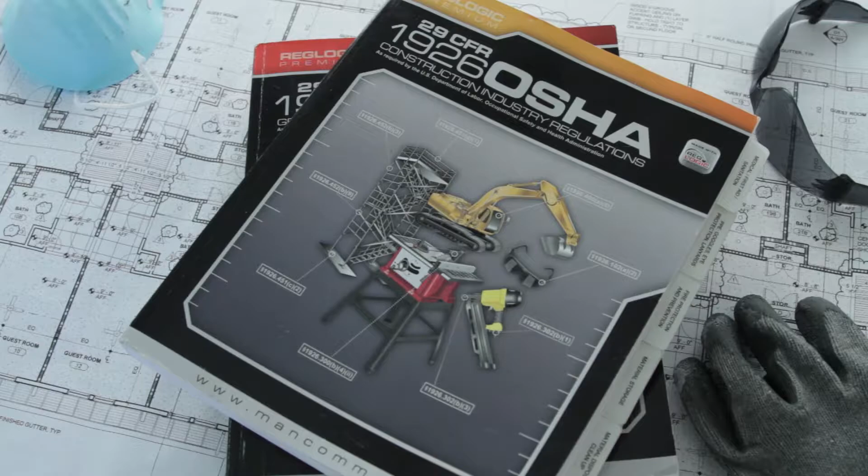Thomas Construction Group has developed a safety and health manual that you, as our subcontractor, may use in the event that you don't have your own program. Our manual has been written with requirements that are on a level with OSHA regulations and above. The Safety Orientation Field Package represents an outline of some of the rules and regulations required by Thomas Construction Group for anyone working on our job sites.

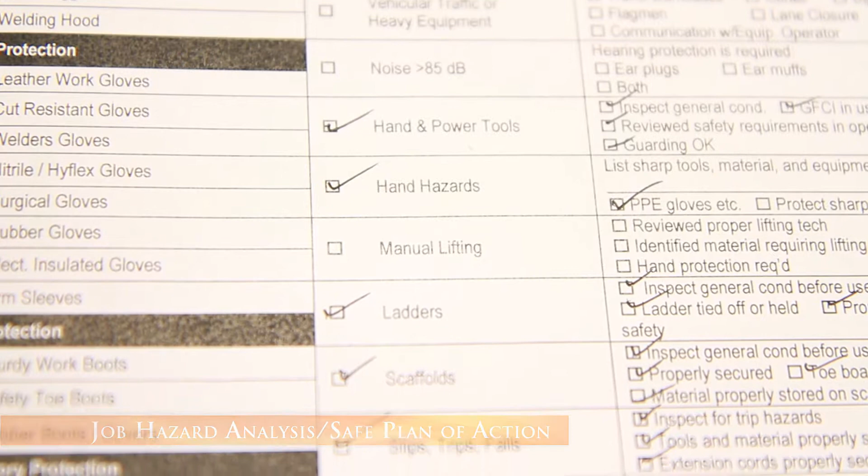As you can see, there is a lot of reference material identifying hazards in many different areas. On a Thomas Construction Group site, we are more interested in dealing with site-specific hazards. To identify and control these hazards, each worker or work group must conduct a study of the environment and any hazards that may be encountered in their specific jobs, and then determine the best method to eliminate or protect themselves from such hazards. A job hazard analysis or safe plan of action must be reviewed before work is started. Ideally, after you identify uncontrolled hazards, you will take steps to eliminate or reduce them to an acceptable risk level.

OSHA states that the Job Hazard Analysis, or JHA, is a technique that focuses on job tasks as a way to identify hazards before they occur. It focuses on the relationship between workers, the task, the tools, and the work environment. Thomas Construction Group uses a daily huddle before every new task that is encountered on the job site. This is where the JHA is discussed by the crews involved.

There is also a daily log that has the safe plan of action attached and is filled out before each job is started. The Safe Plan of Action, or SPA, is a checklist of most potential hazards and the actions to be taken to eliminate, avoid, or protect yourself from them. An accident is the occurrence of an unexpected event. Consequently, if we take time to know the hazards and identify them, there will be no unexpected events.

Whenever work is performed, your employer is responsible to have a designated competent person on site. OSHA defines a competent person as one who is capable of identifying existing or predictable hazards in the surroundings or working conditions which are unsanitary, hazardous, or dangerous to employees, and who has authorization to take prompt corrective measures to eliminate them.

If you have any questions or feel the least bit uncomfortable or unsafe about the task you are about to perform, stop and consult with your supervisor and/or designated competent person before you go any further. There are a few basic rules you must follow when working on a Thomas Construction Group job site. Thomas Construction Group has zero tolerance for the use of illegal drugs or alcoholic beverages on their job sites. Anyone injured as a result of an accident on the job will be automatically drug tested within 8 hours after

the injury. Hard hats must be worn at all times unless otherwise directed by the Thomas Construction Group superintendent. Hats are to be worn as designed, brim in the front, and no baseball caps may be worn under the hard hat. Proper clothing must be worn. Sleeves at a minimum of 4 inches in length and full-length pants. Hard sole shoes or boots must be worn at a minimum unless otherwise directed by the Thomas Construction Group superintendent.

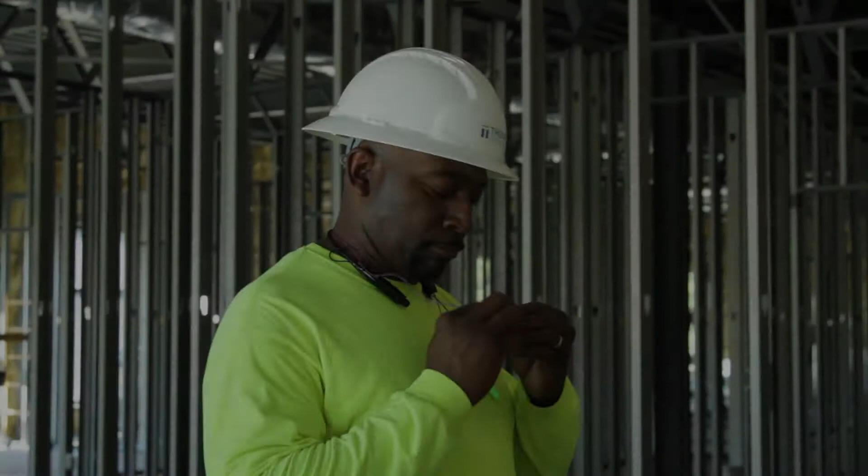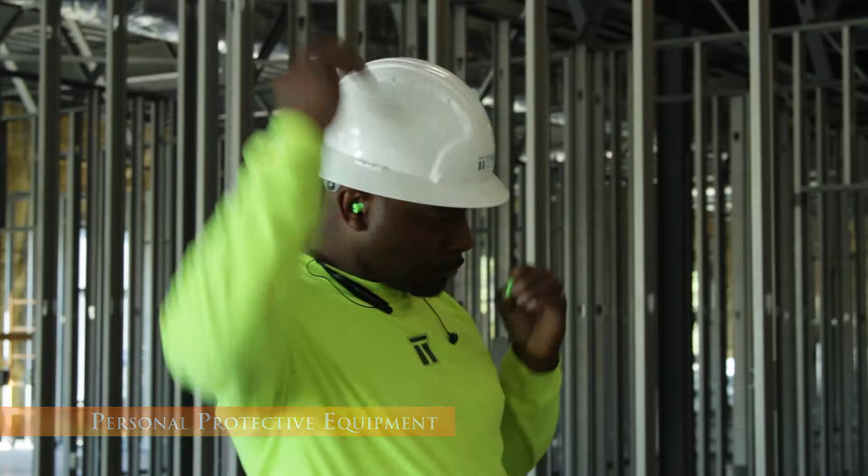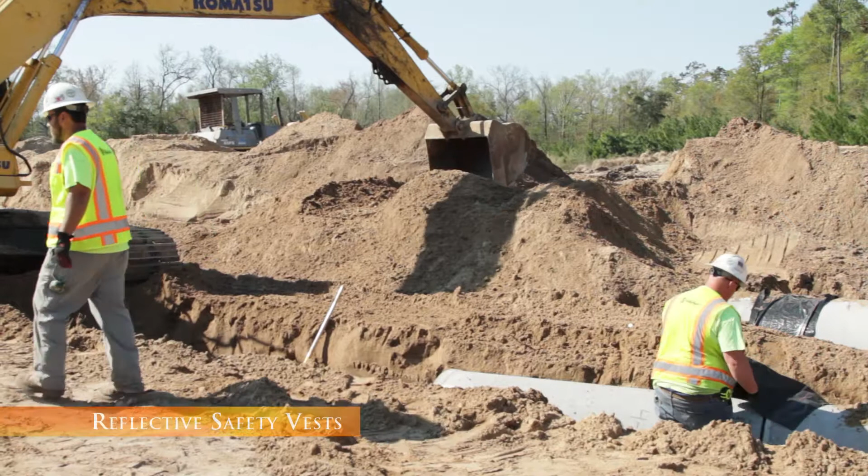Personal protective equipment, or PPE, such as safety glasses, hearing protection, gloves, face shields, respiratory protection devices, etc., shall be worn in accordance with the requirements of the OSHA Regulations 29 CFR 1926.95 through 107 Subpart E. Reflective safety vests shall be worn when working around heavy equipment, high vehicle traffic areas, or at the Thomas Construction Group superintendent's discretion. Only authorized personnel are permitted to operate equipment or vehicles on site.

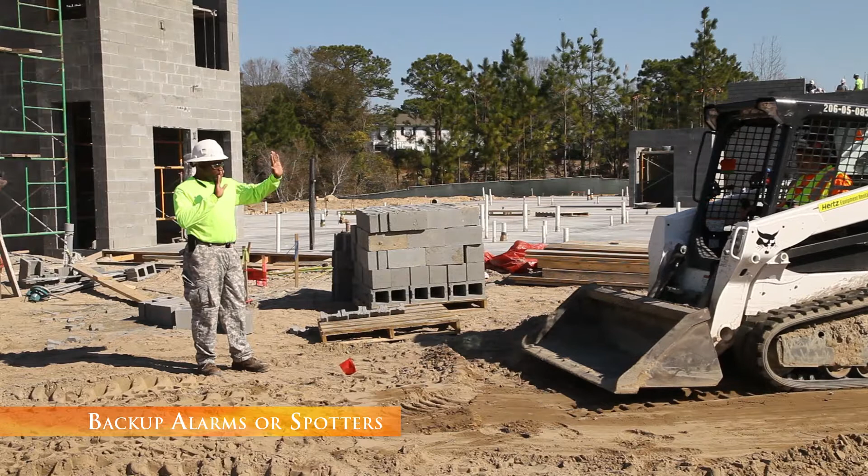Current certification is required for forklift operators. No riders on machinery or equipment. Riding in the back, outside of the cab of trucks is prohibited. All heavy equipment with limited visibility must have an operable backup alarm or a spotter when backing up. Seat belts shall be used in all vehicles and equipment that are equipped with them.

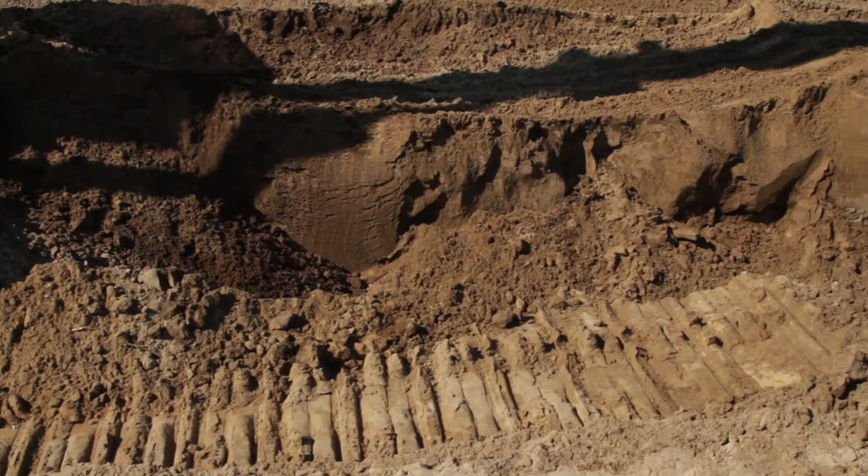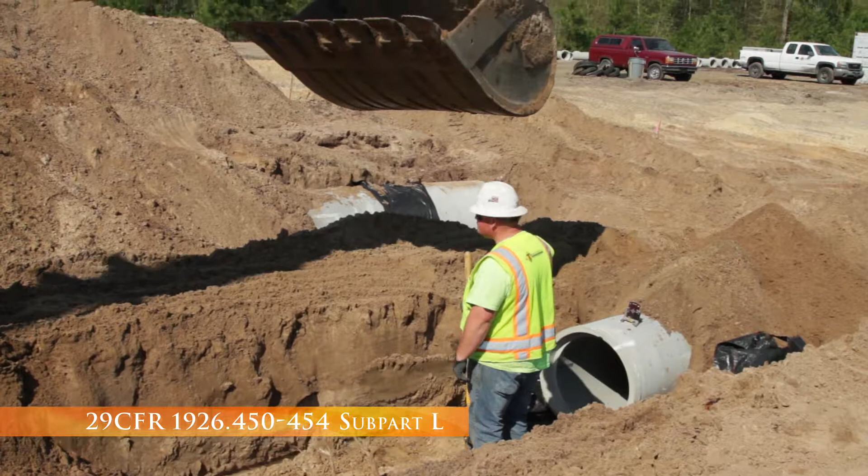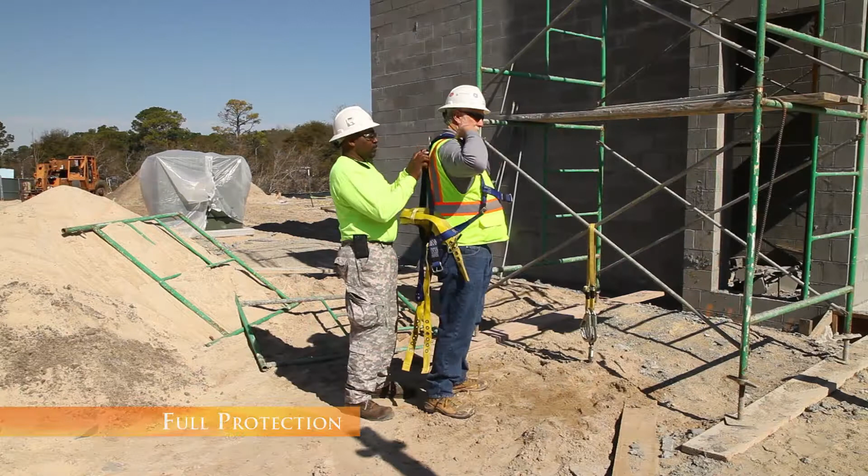No one shall enter a trench or excavation over 5 feet deep unless it is properly sloped, shielded, or shored in accordance with the OSHA standard 29 CFR 1926.650 through 652 Subpart P and has been inspected by a competent person. Immediately report all accidents, unsafe conditions, or practices to your supervisor. Any individual performing work at a height of 6 feet or more must have fall protection in accordance with OSHA Standard 29 CFR 1926.500 through 503 Subpart M.

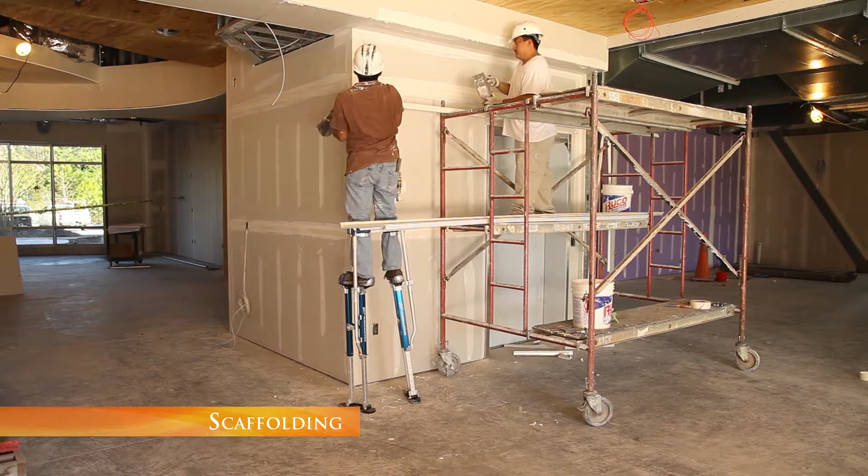All scaffolding is to be erected and maintained by a competent person in a manner consistent with OSHA Standard 29 CFR 1926.450 through 454 Subpart L. Safety Program. The Thomas Construction Group Safety and Health Manual is available for any subcontractor or sub-tier in the event that they do not have their own safety program. Any rules or regulations in these programs that are greater than the OSHA standards will take precedence over the OSHA

standards. The Thomas Construction Group Safety Program requires that anyone injured on the job must choose one of the named physicians or medical facilities listed for that job. If you seek medical treatment elsewhere other than the listed physicians or medical facilities for an on-the-job injury, you will be responsible for your medical bills.

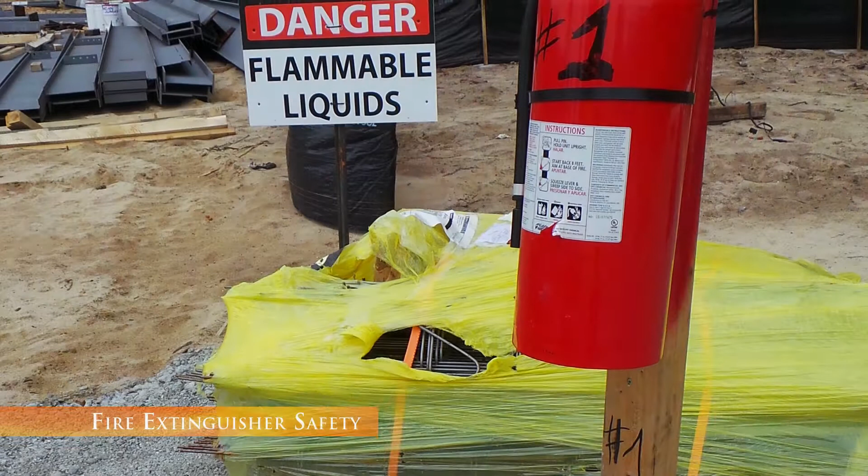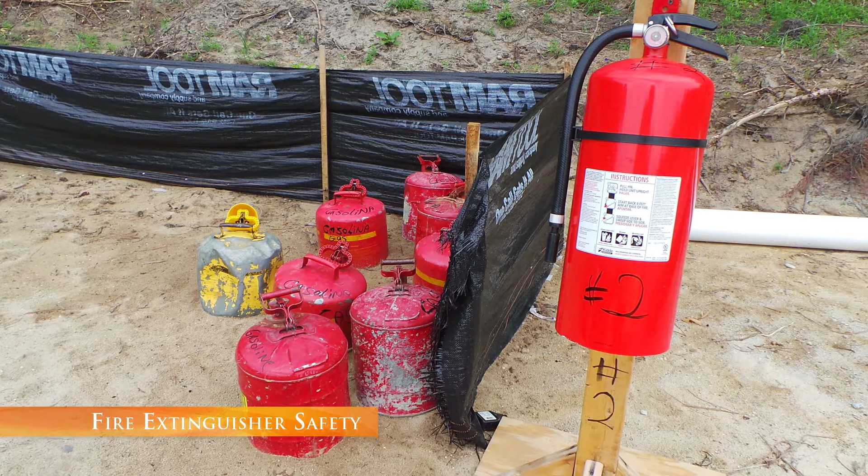Fire extinguisher safety. A fire extinguisher rated not less than 2A shall be provided for each 3,000 square feet of the protected building area. Travel distance from any point of the protected area to the nearest fire extinguisher shall not exceed 100 feet. A fire extinguisher rated not less than 10B shall be provided within 50 feet of wherever more than 5 gallons of flammable or combustible liquids or 5 pounds of flammable gas are being used on the job site.

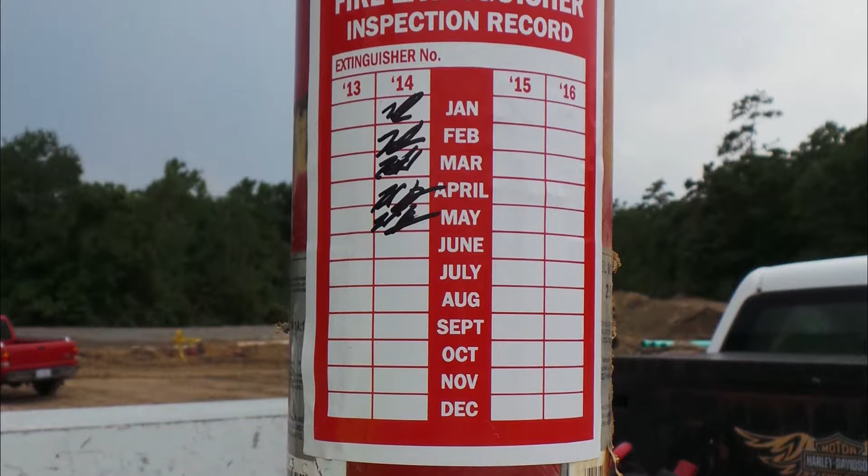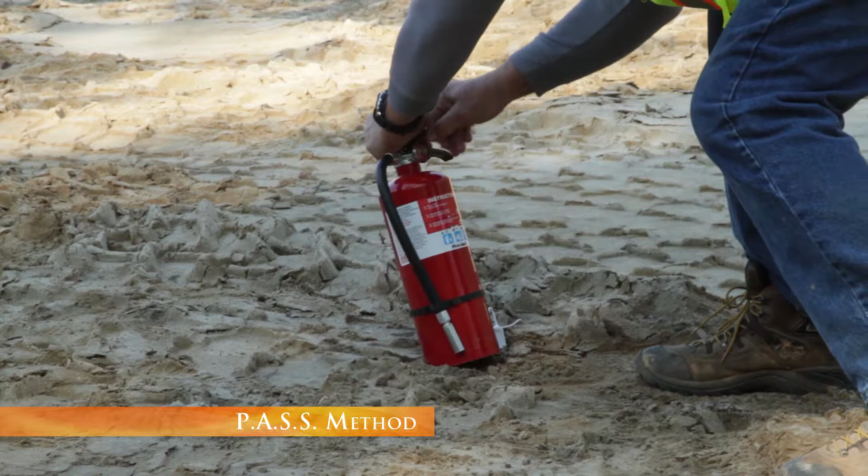Portable fire extinguishers shall be inspected periodically and maintained in accordance with Maintenance and Use of Portable Fire Extinguishers, NFPA number 10A-1970. All fires, no matter how small, must be reported immediately to your supervisor. Try to stay upwind of fire when using a fire extinguisher and use the PASS method. Pull the pin, aim the extinguisher at the base of the fire, squeeze the handle, sweep the extinguisher from side to side from outside towards the center of the fire.

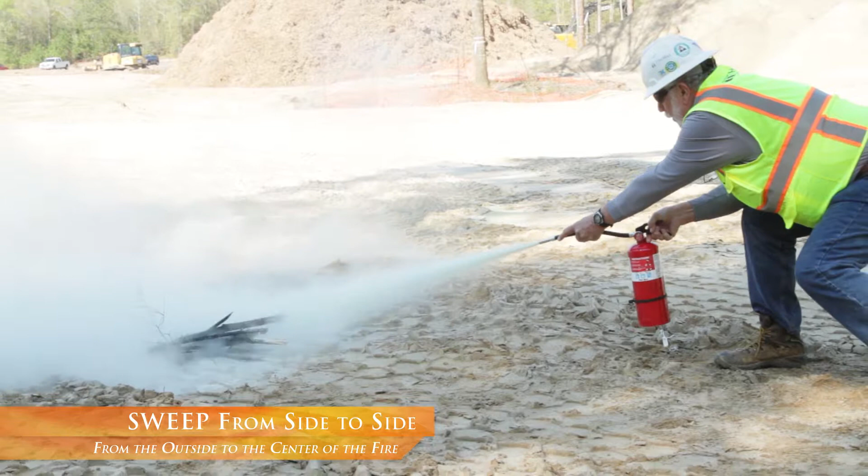Hazard communication. Most hazards will fall into 5 broad categories. 1. Flammables and combustibles. 2. Compressed gases. 3. Poisons. 4. Corrosives. 5. Irritants. A hazardous substance can enter the body via 4 routes. 1. Inhalation. 2. Ingestion. 3. Absorption. 4. Injection.

Material Safety Data Sheets, or MSDSs, contain the following information: 1. How to properly handle and store. 2. Outline spill cleanup procedures. 3. Medical and first aid procedures.

The material safety data sheets are filed in a manual kept in each Thomas Construction Group office trailer and are available for subcontractors' use. Information on chemicals that are actually on the job site is filed in the front of the MSDS manual, including a list or log of all hazardous chemicals on site.

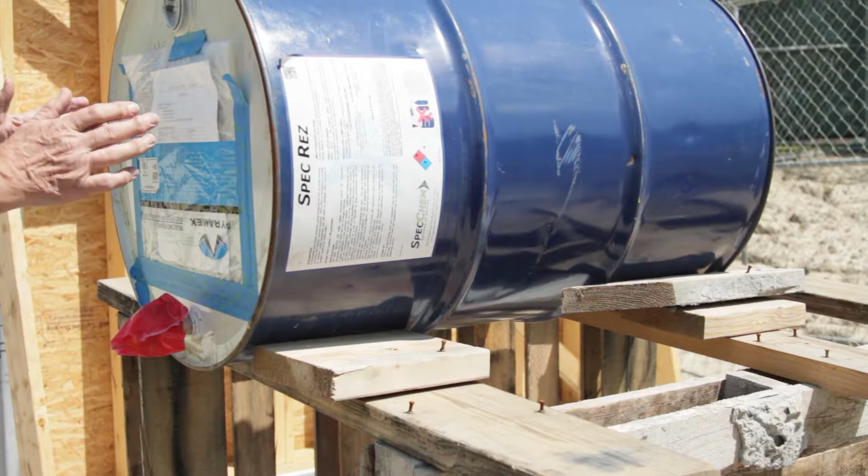All subcontractors must provide a copy of the MSDS for any chemicals that they bring on the job site. All of their personnel must be trained on the HAZCOM program by their employer and understand the hazards of any chemicals that they may be exposed to. All employees must be trained in the Globally Harmonized System, or GHS, which is associated with the Hazard Communication Standards.

Emergency Action Plan. In the event of a fire, hurricane, tornado, or other natural catastrophe at our job site, all personnel will evacuate the buildings in an orderly manner and meet at the Thomas Construction Group office trailer. If the trailer is involved in the incident, the secondary muster area will be in the parking lot. Once gathered, each group of workers or subcontractors will be accounted for by a roll call conducted by their supervisor or lead person. This information is to be passed on to the Thomas Construction Group superintendent.

Emergency phone numbers and the nearest medical facility are posted on the wall of the Thomas Construction Group office trailer. Typically, 911 is the phone number of choice to call in an emergency situation. Personnel are strictly forbidden to discuss project conditions, incidents, or accidents with the owner, media, press, or any person not directly involved with the emergency.

OSHA has determined there are 4 areas in construction that lead all others in the number of accidental injuries and deaths. If OSHA finds you in violation of any safety rules or regulations within the Focus 4 during a site audit or investigation, the citation will most likely be considered as serious, and the fines usually start at around $7,000 per violation. The Focus 4 are as follows: electrical, falls, struck by, and caught between hazards.

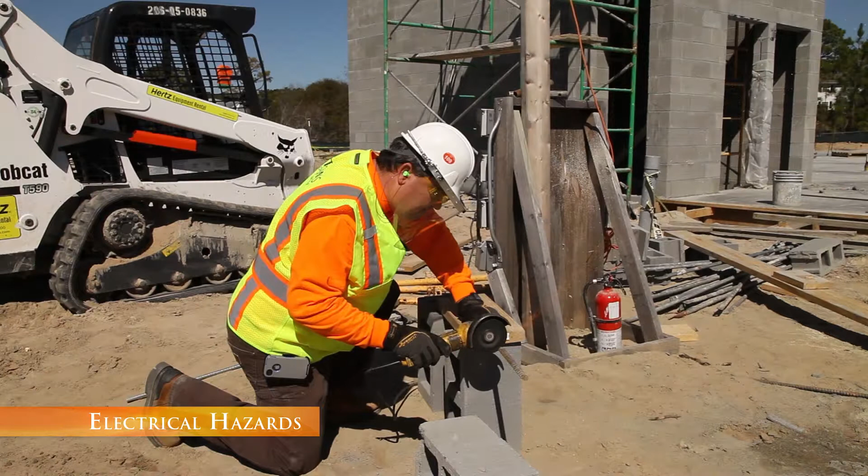1. Electrical. All electrical equipment and power tools must be protected from shock hazards by use of a ground fault circuit interrupter, or GFCI plug, or by double insulation. All electrical power drop cords must have grounding lugs and insulation of wires intact. Nothing under size 12 gauge cords should be used. Cords found defective must be repaired by a qualified person immediately or removed from service by cutting off the male plug end.

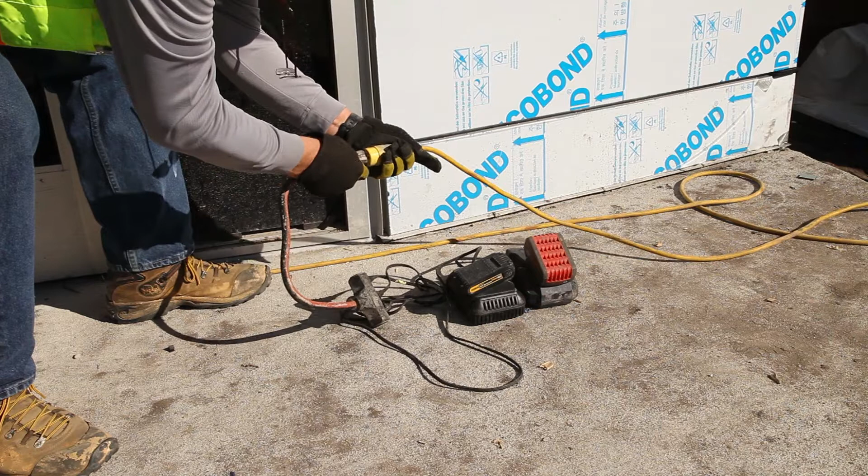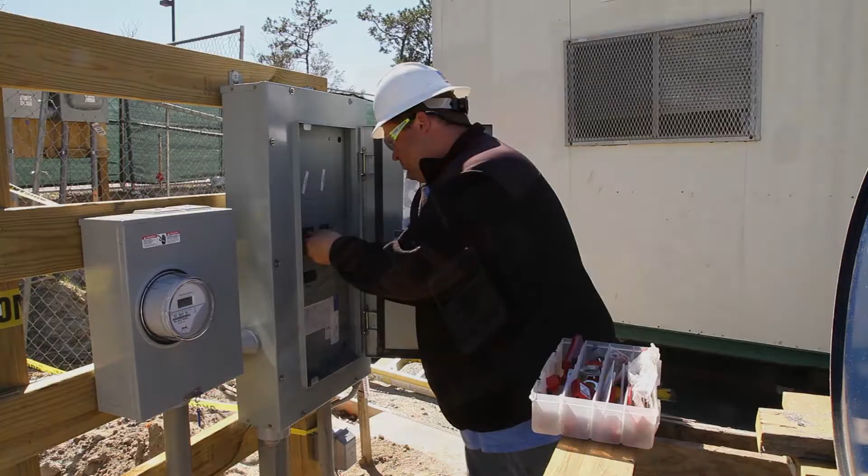Ensure that electrical equipment is free from recognized hazards that are likely to cause a serious injury or death to employees. Safety of equipment shall be determined on the basis of 29 CFR 1926.403. Lockout or tagout of energized equipment shall be in accordance with 29 CFR 1910.147 and 1926.803. Competent person required. 2-prong plugs are not permitted in the construction area unless the equipment is double insulated.

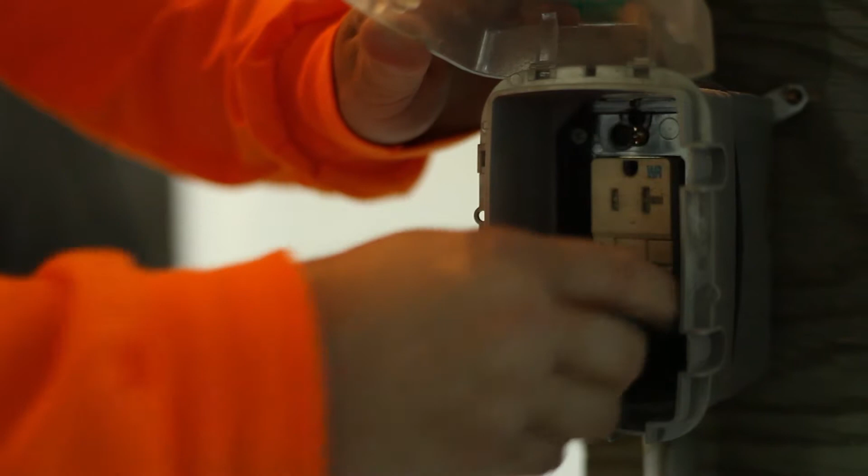Periodic inspections of drop cords, GFCIs, corded power tools, and equipment are required with proof of the actual inspections. If the subcontractor does not have a means of documentation of these inspections, we suggest that you use the Thomas Construction Group color code system for documentation.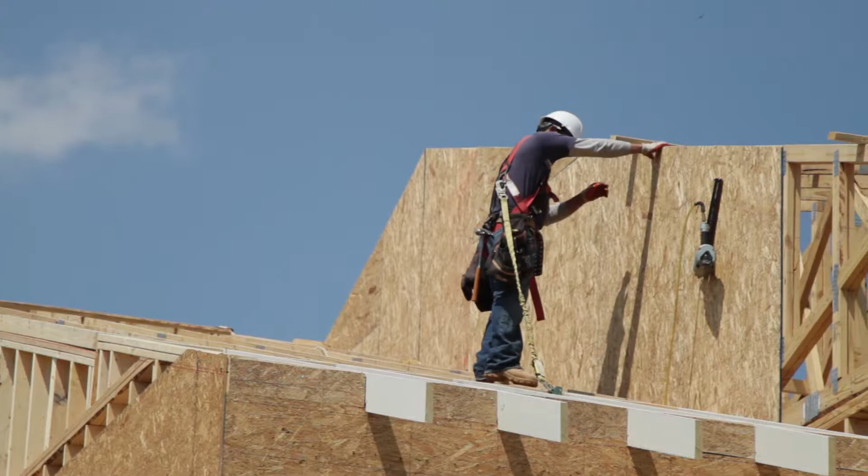Falls. Thomas Construction Group has set 6 feet as the minimum height above a lower level where fall protection must be used. Guardrail systems, a safety net system, or personal fall arrest systems are all acceptable methods of achieving adequate fall protection. Warning lines with a controlled access zone may be used in some cases. The best system to use can be determined by following the guidelines offered in 29 CFR 1926.500 through 503, Subpart M.

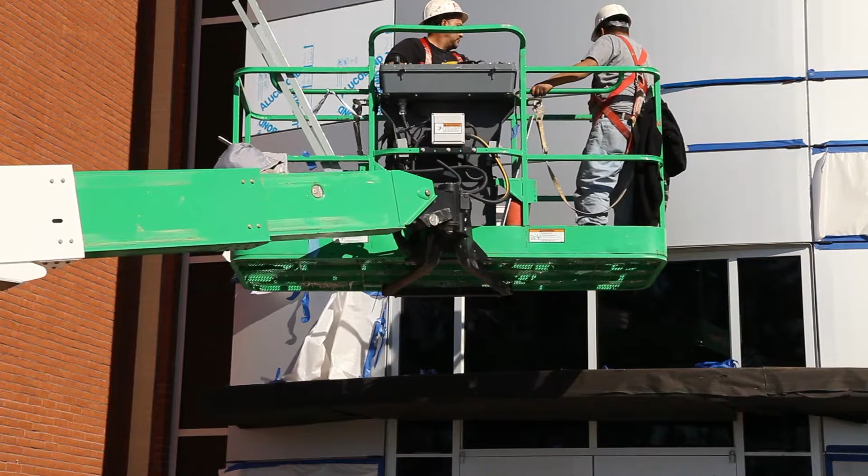All persons working at heights must be trained by their employer in the proper use of whatever fall protection system they are using before starting work. Other areas of falling would include working on ladders, scaffolding, aerial lifts, or simply tripping and falling at ground level. Ladder use is a potential concern for fall hazards.

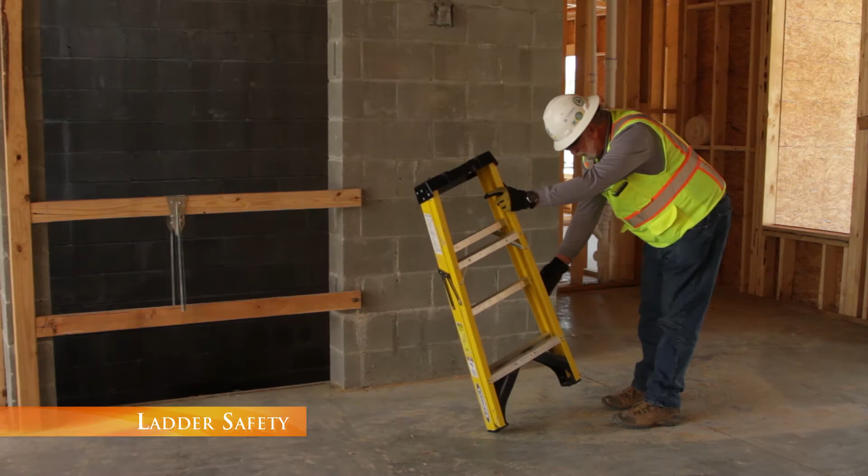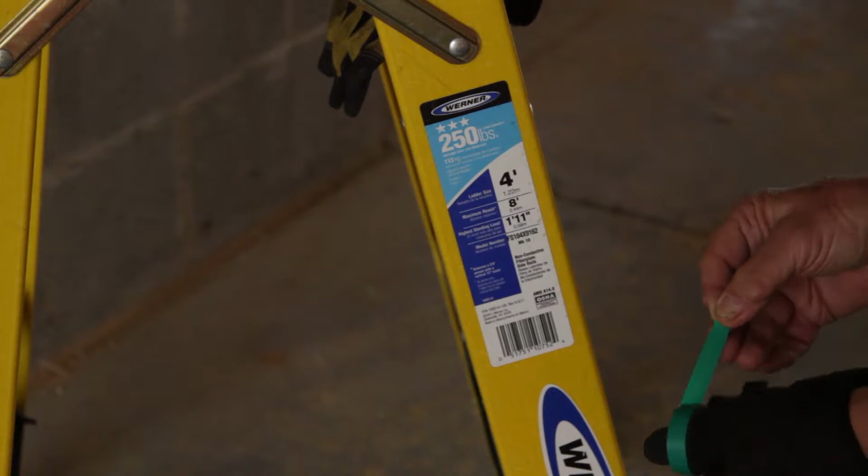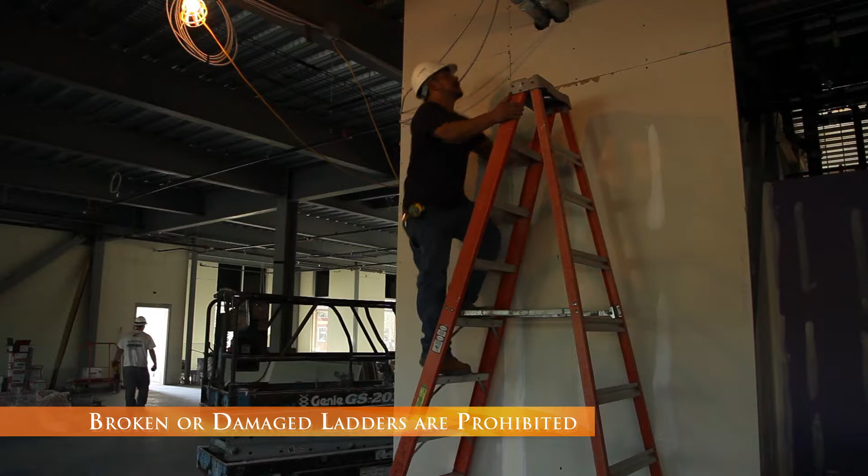All personnel using ladders must be trained in the proper inspection, care, and use of the type of ladder that they are using. The following are guidelines for using ladders. All ladders must be inspected periodically and prior to use. The use of ladders with broken or missing rungs, broken or split side rails, or other structural damage is prohibited. Portable ladder feet shall be placed on a substantial base at a 4-to-1 pitch with the area around the top and bottom clear and clean at all times.

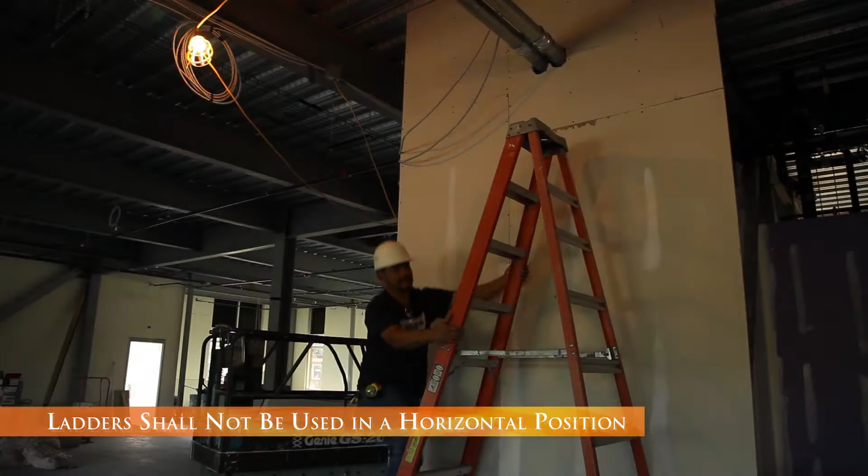Ladders shall not be used in a horizontal position as a platform, runway, or scaffold. Portable ladders shall be tied off, blocked, or otherwise secured to prevent movement and extend 3 feet above the landing, if possible. Avoid the use of metal ladders when the possibility of contact with electrical power exists. Always clean mud or greasy substances from shoes before climbing a ladder.

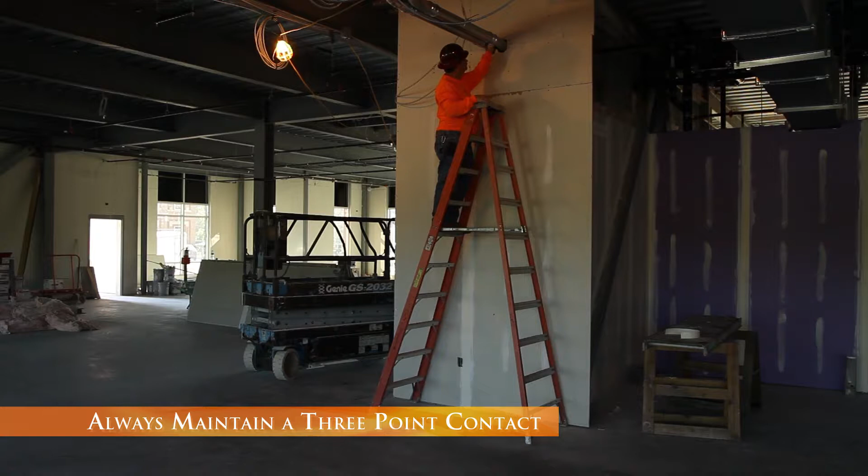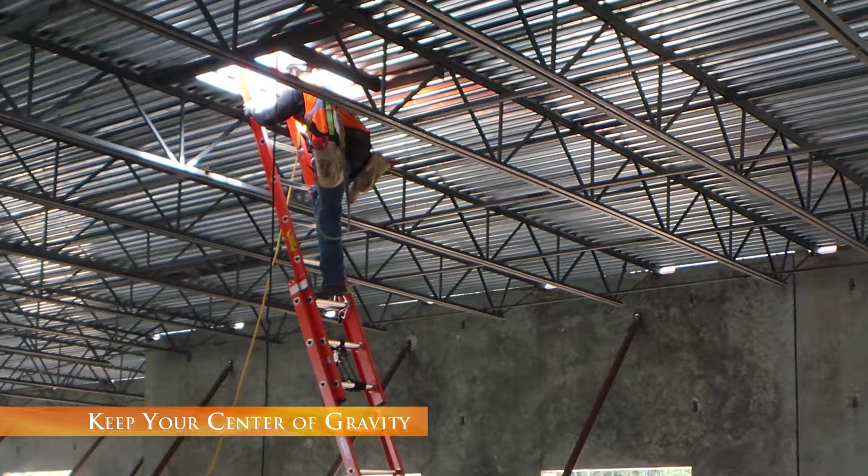Always face the ladder and maintain a 3-point contact, 1 hand and 2 feet, or 2 hands and 1 foot, while climbing up or down, or just standing. It is dangerous to reach out too far from a ladder in any direction. Keep your center of gravity as close to the ladder as possible. Move the ladder as the work requires.

Never step or stand on the second from the top or the top step of a step ladder. Do not use a step ladder as a straight ladder. Open fully in locked position. Always use a ladder as designed. Make sure that all labels, decals, and tags are in place and legible.

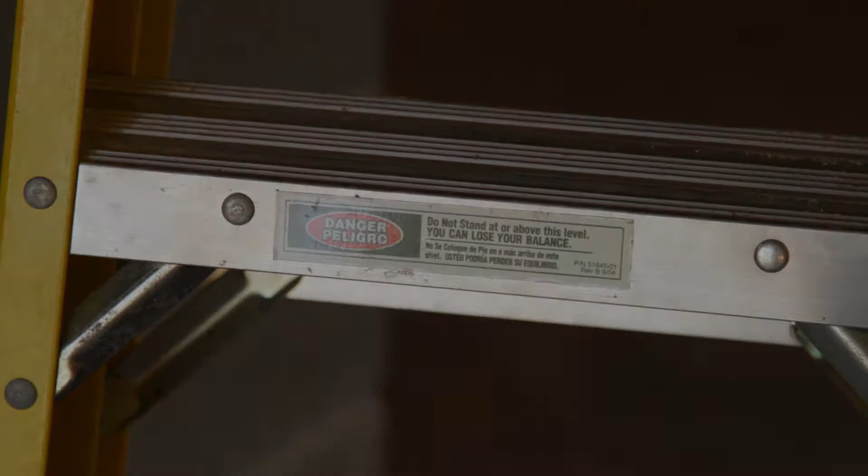All ladders must be periodically inspected and documented. If your company does not have a method of documentation, the color code system used by Thomas Construction Group is acceptable for this job site.

Struck by and caught between hazards. Struck by injuries are produced by forcible contact or impact between the injured person and an object or piece of equipment. When the impact alone creates the injury, the event is considered as struck. On the other hand, when the injury is created more as a result of crushing injuries between objects, the event is considered as caught. The most common types of struck by hazards are as follows.

1. Struck by flying objects. 2. Struck by falling objects. 3. Struck by swinging objects. And 4. Struck by rolling objects.

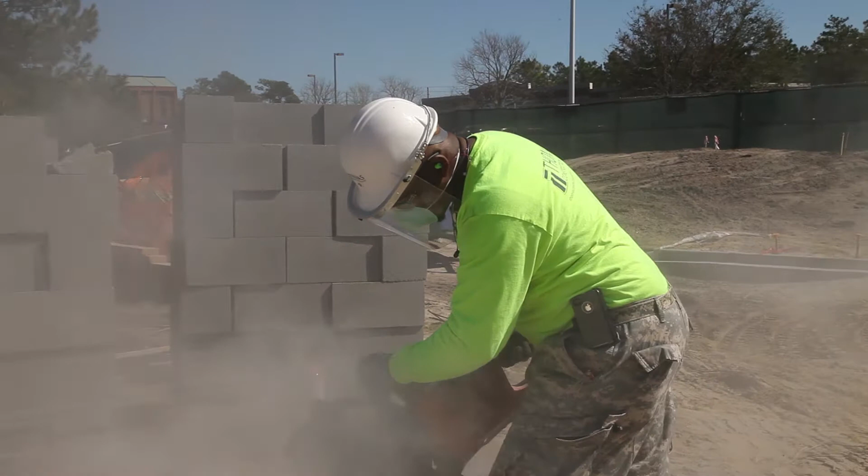1. Flying objects. Flying objects hazard exists when something has been thrown, hurled, or is being propelled across space. It can include instances when a piece of material separates from a tool, machine, or other equipment, striking a worker, resulting in injuries or fatality. Also, a hazard exists if an object is ejected under power by a tool or equipment usually designed for that purpose, such as a nail from a gun. Always remember that the use of compressed air can cause flying object hazards.

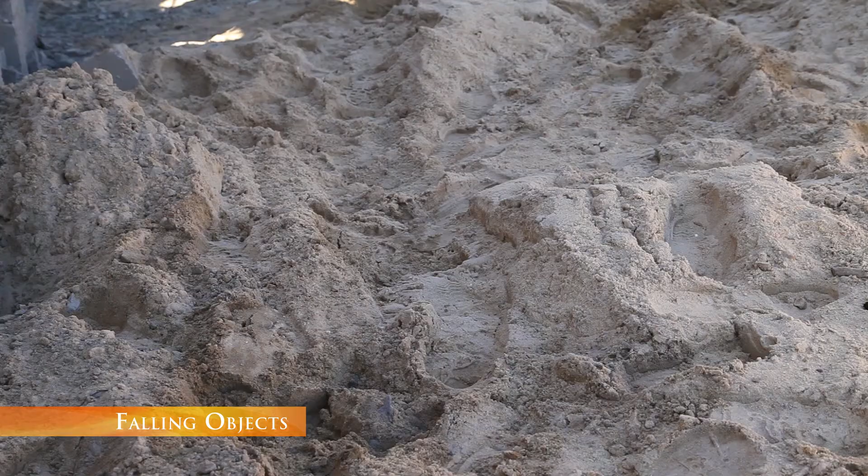2. Falling objects. Falling objects occur when the source of injury is falling from an elevation to a lower level, including instances where the injured person is crushed, pinned, or caught under a falling object, other than collapsing material or structures, resulting from being struck by a falling object or equipment.

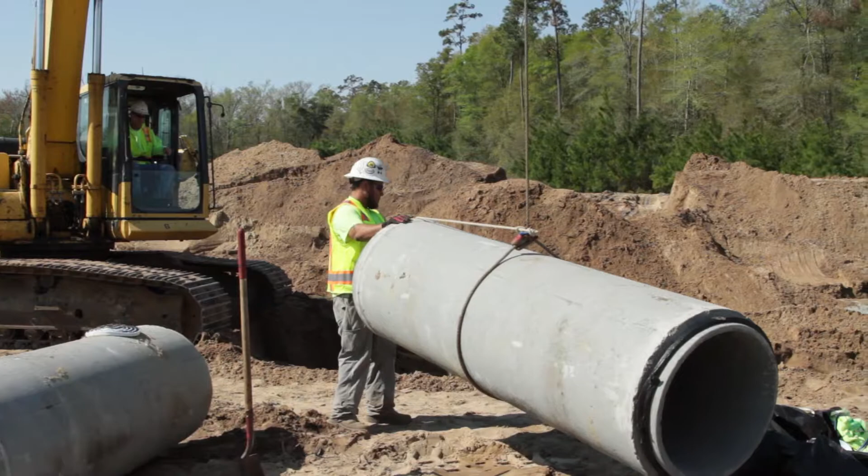3. Swinging objects. Swinging objects occur when materials are mechanically lifted and have the potential to swing and strike workers. As the load is lifted, the materials may swing, twist, or turn. This movement can catch workers by surprise, and they could be hit by the swinging load. Windy conditions are especially hazardous because the load will swing more. Loads must be rigged properly to prevent swinging.

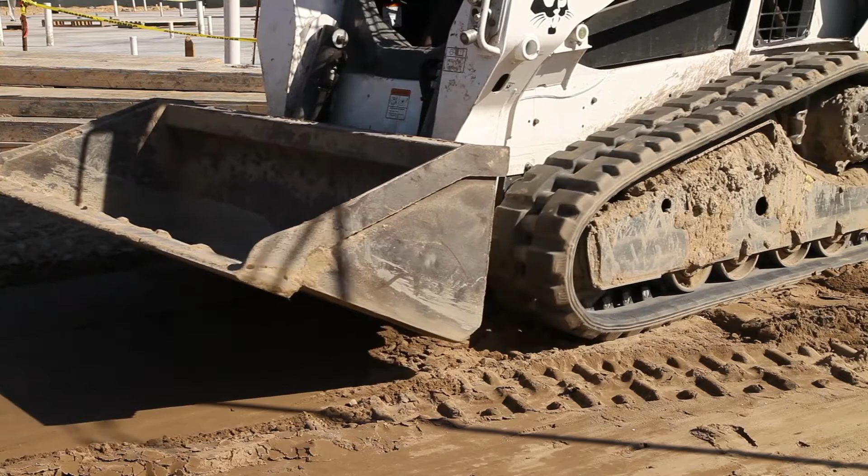4. Rolling objects. Rolling objects injuries occur when an object is rolling, moving, or sliding on the same level at which the worker is located. This includes instances in which the worker is struck or run over by a moving vehicle without being caught under it, or instances in which the worker is struck by a sliding object or equipment on the same level.

Working in trenches or deep holes presents the highest risk of being involved in a caught-between accident, which usually results in a very serious injury and often death.

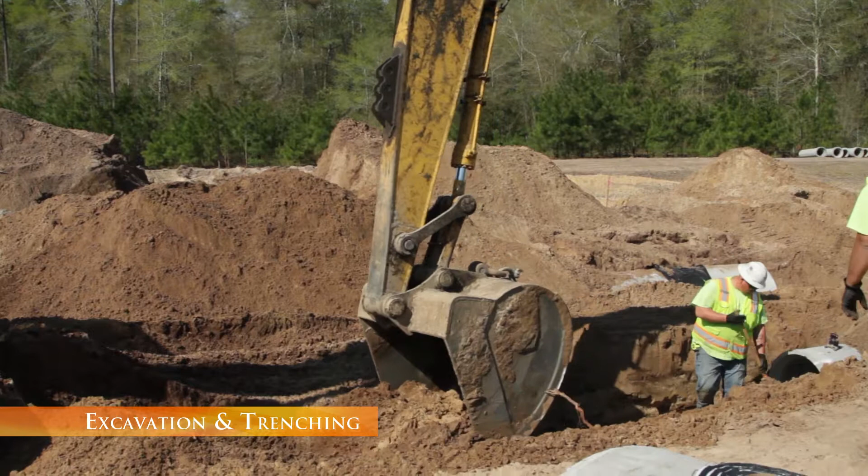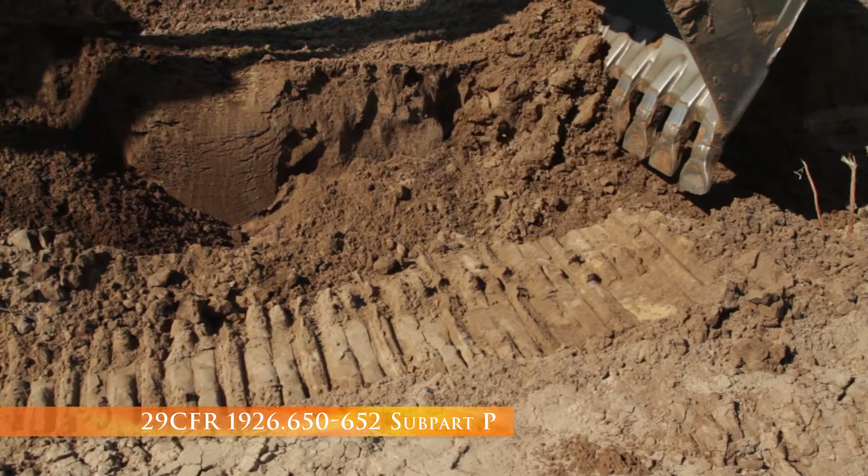Excavation and trenching. Anytime a trench or excavation reaches a depth of 5 feet or more, it must be sloped, benched, shielded, or shored as prescribed in 29 CFR 1926.650 through 652 subpart P. Sloping would not be required if a trench box or shielding is used. Any trenches or excavations exceeding 20 feet must have sloping, shielding, and/or shoring designed by a licensed professional engineer.

All trenches and excavations must be maintained and inspected by a competent person before each shift and after a rain or storm. A stairway, ladder, ramp, or other safe means of egress shall be located in trench excavations that are 4 feet or more in depth so as to require no more than 25 feet of lateral travel for the workers in the trench. All personnel working in or near trench excavations must be trained on that subject. The competent person or his or her supervisor should call 811 and have underground interferences checked out before beginning excavation.

A clean job is a safe job. Thomas Construction Group has set our housekeeping expectations way above what has been acceptable in the construction business for years. Housekeeping. Thomas Construction Group holds all subcontractors responsible for continuous cleanup of their work areas. Don't wait till the end of the shift or day to clean up. By continuous cleaning, you will eliminate slip, trip, and fall hazards.

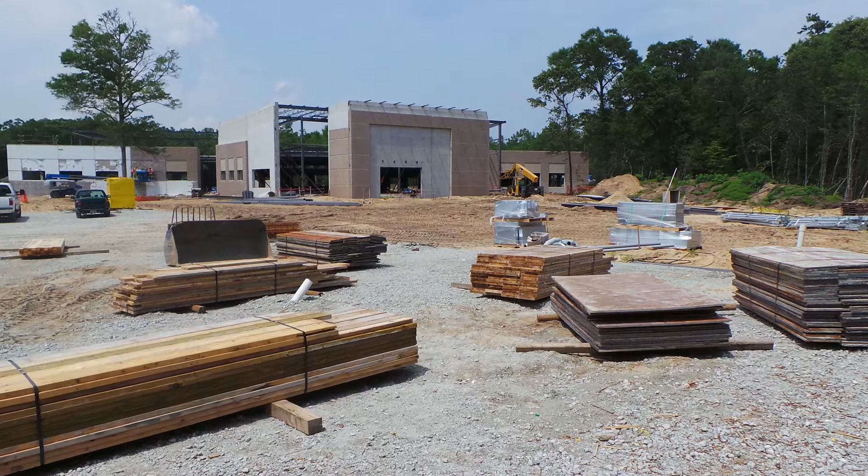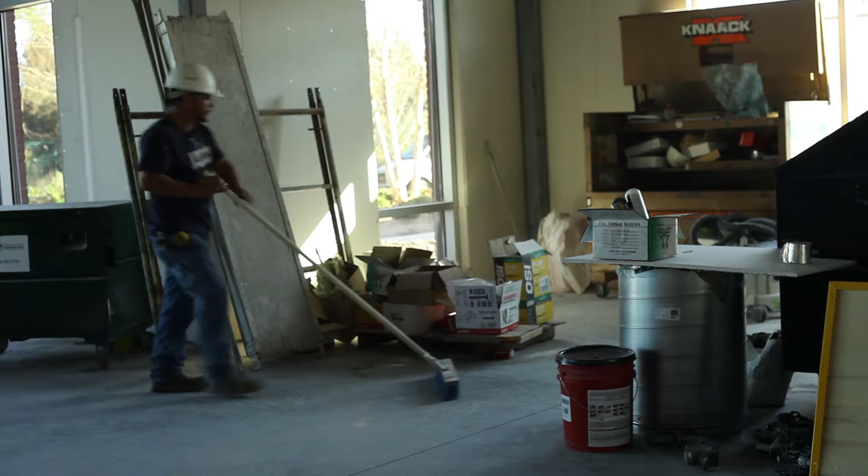Material storage falls under housekeeping. Stored material must be neat and orderly and be sitting on dunnage in most cases. In the event that a company or subcontractor refuses to keep their work areas to our housekeeping standards, the Thomas Construction Group superintendent will hire a crew to perform the necessary cleaning and housekeeping. The cost of the work will be passed on to the subcontractor or company involved.

Substance abuse policy. Just a reminder that Thomas Construction Group has zero tolerance for the abuse of illegal substances, taking somebody else's prescribed medication, the use of alcoholic beverages, and the like on the job site. Pre-employment and post-accident drug screening is a requirement for all Thomas Construction Group employees.

Safety citation. Thomas Construction Group has a 3 strikes you're out policy with safety citations. You will receive a written warning for your first safety citation due to a violation. Your second offense will result in a written citation and 2 to 3 days off without pay. And the third will result in permanent termination. The penalties depend on the seriousness and/or severity of the violation. Thomas Construction Group reserves the right to terminate any employee for any safety infraction.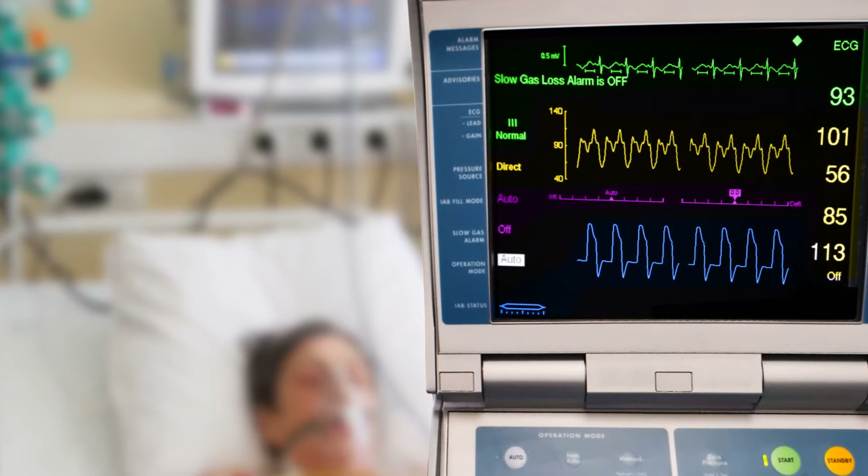Accident termination policy. Thomas Construction Group adopts the following policy regarding recurring injuries for the purpose of reducing or eliminating repetitive injuries among employees. If an employee has 3 accidents or injuries which are caused by the employee, or if the employee causes 2 accidents or injuries to another employee within any 12-month period, he or she will receive a written warning from the safety coordinator. The written warning will state that if another accident occurs due to the actions or inactions of the employee within 6 months from the date of the warning, the employee will be terminated.

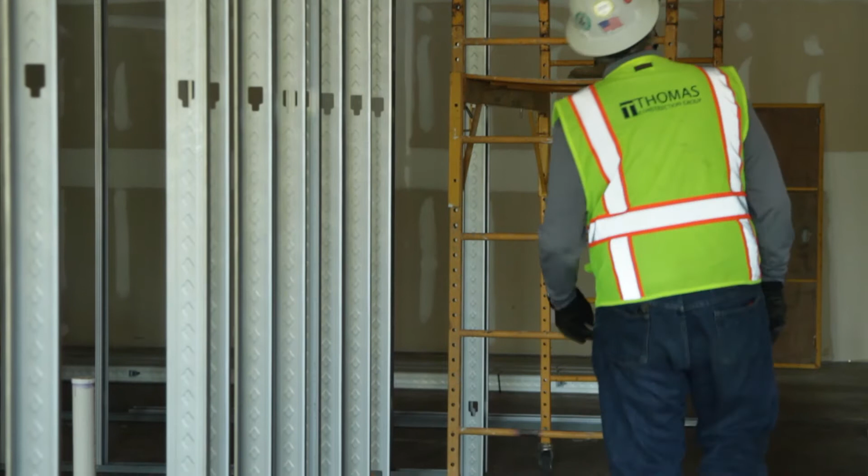Thomas Construction Group considers safety as the most important part of your job. Our goal is for you to go home uninjured to your family and friends at the end of each workday. This video is designed to cover some basic expectations while working on a Thomas Construction Group job. It is also important for you to review the Thomas Construction Group Safety and Health Manual, your company's safety manual, if available, and the OSHA safety standard and regulations.

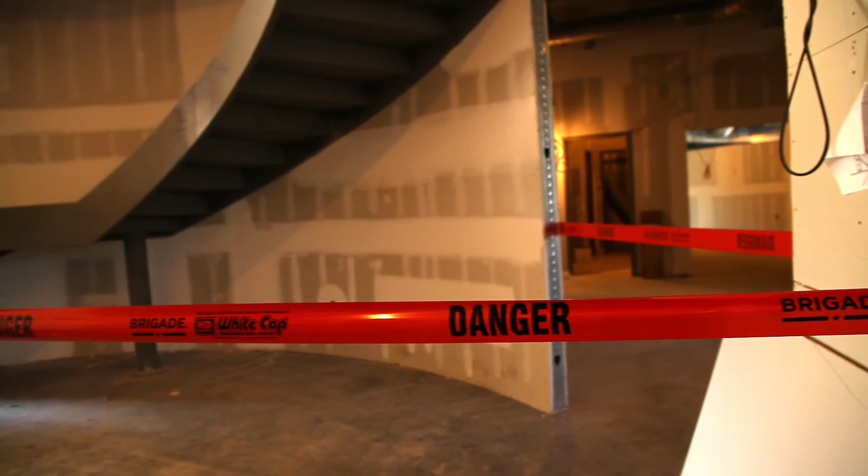Thomas Construction Group is dedicated to safety, which is why we are a part of the North Carolina Department of Labor SHARP, Safety and Health Achievement Recognition Program. This program ensures that our job sites are as safe as possible. OSHA members visit our job sites very frequently to ensure that all rules and regulations are being followed. Thomas Construction Group was the first general contractor in the state of North Carolina to receive the SHARP Award. We encourage all of our subcontractors to get involved with this program.

Remember, when working on a Thomas Construction Group job, we expect the following: better than average housekeeping. Conduct yourself in a professional manner. No rude, abusive, and suggestive comments used or on clothing. If you create a hazard, you must correct it immediately and protect other workers in the area from exposure to that hazard. Place approved caps over the ends of vertical reinforcement steel bars or other objects that present an impalement hazard from falls.

If at any time you are concerned with your company's safe practices or responsiveness to your safety concerns, you can report it confidentially to Thomas Construction Group management personnel so that the issue can be addressed immediately. Remember, it is your responsibility to follow all of the rules as a working member of this project and to remind your fellow workers of these safety rules. It is everyone's job to make this construction site as safe as possible.

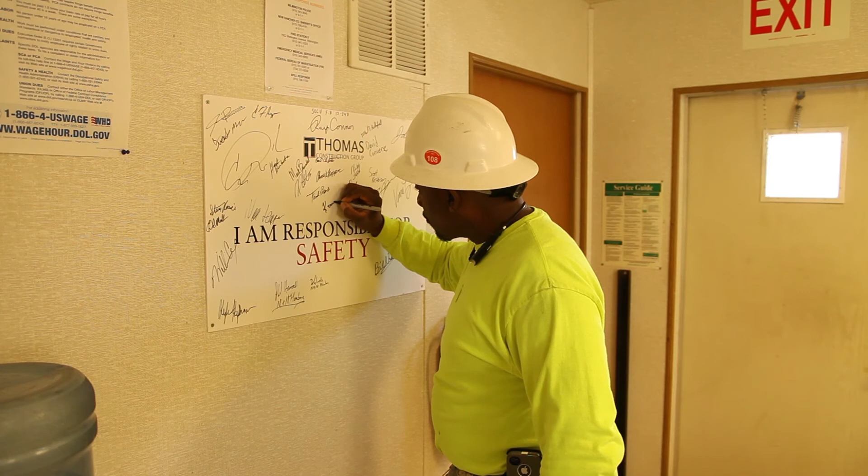Following the orientation session, you will sign in the orientation log and our I am responsible for safety poster board. Finally, you will receive a hard hat sticker. Completion of the orientation and signing of the log and safety poster indicates you understand our safety orientation presentation and agree to comply with its contents. Welcome to our job site.